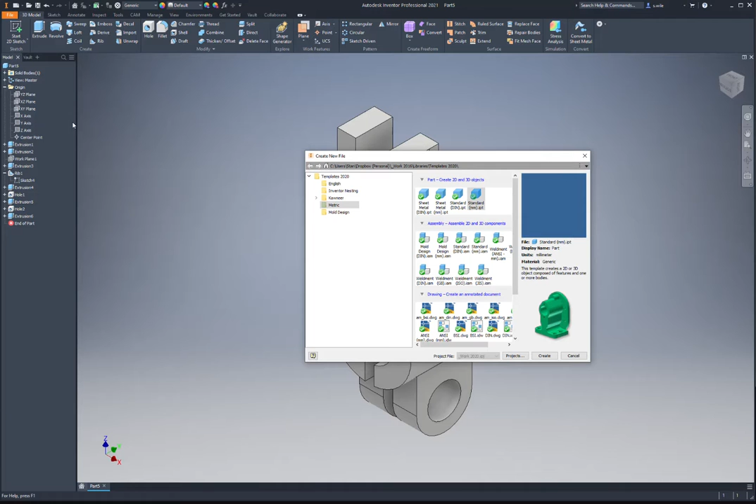So this is the next image in the exercise. Let's knock it out. It's metric part 2. I'm working off a printed copy and the text didn't print very well. But it's kind of fun to model these simple parts.

I'm going to start with the base. Your base feature, you want to always figure out what makes the most sense to build off of. I'm going to start with the bottom, and we'll do a center point rectangle, 120 by 42.

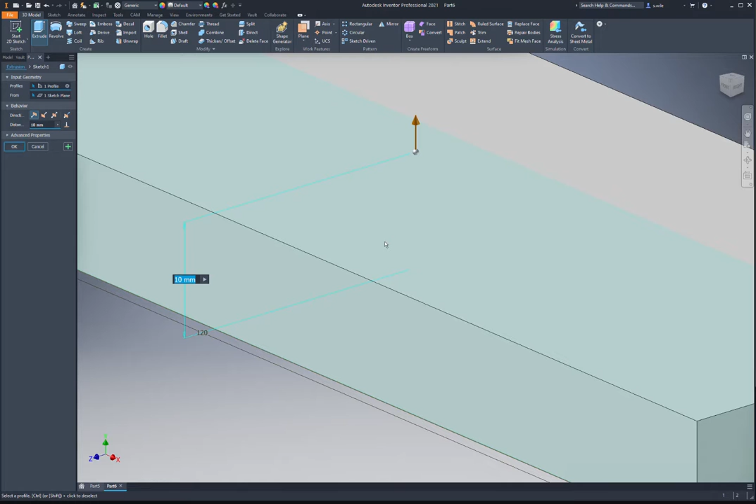And that goes up 10. So that's the base. Let's do this piece and the back piece next. It looks like there's a rib maybe in the back.

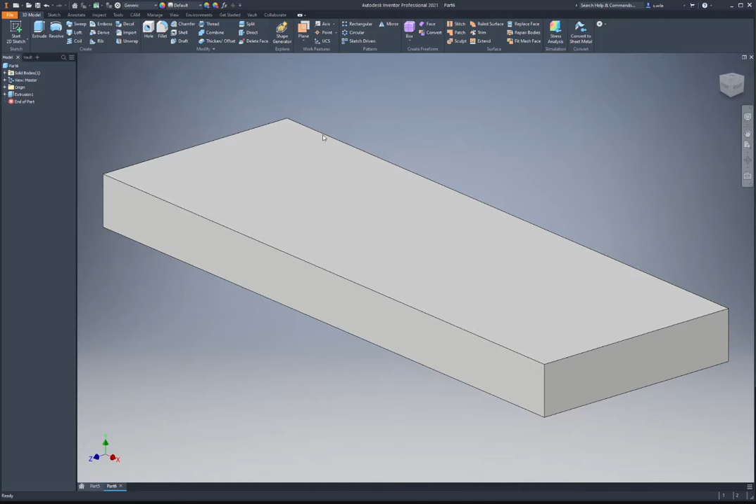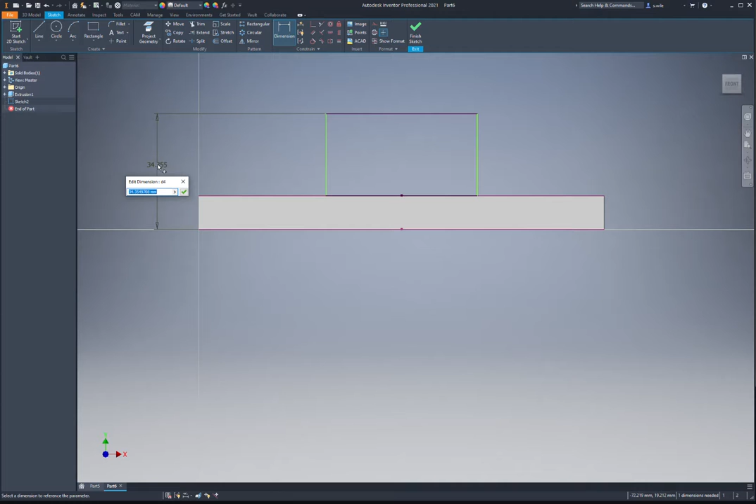So I'll do a midpoint to midpoint, get the little dots, and I'm going to take it all the way up to the center, I think. So we'll cut it away with the hole afterwards. That'll give us a center point for that hub. I think it says 105.

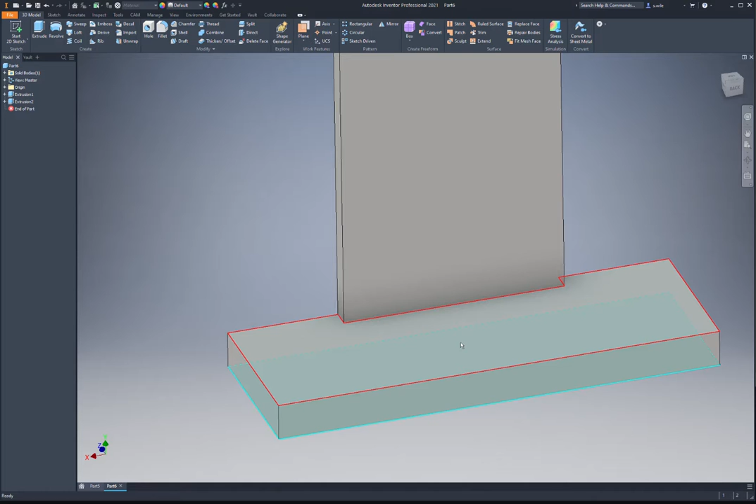And then we'll put that rib here. It's probably a 5 as well, just right down the middle. Let's project it... that's too much work. Let's just do a midpoint again.

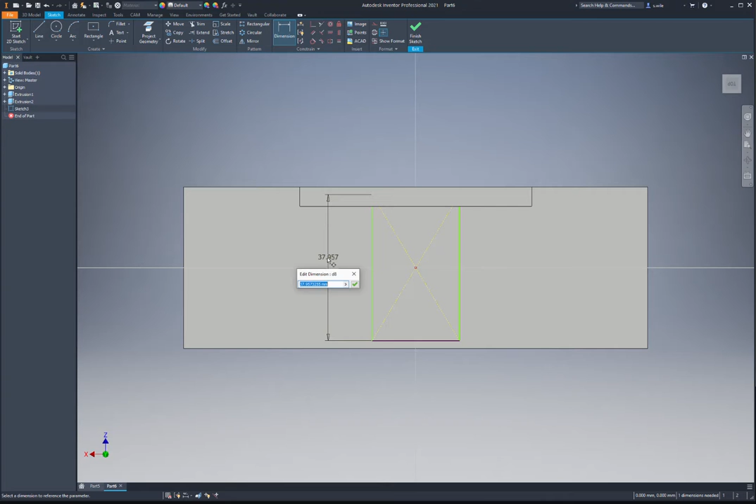And this is 42. I'm just going to tell it to go to here. And we'll put that circle on. We'll do the circle next, and then maybe that top.

I'll try to get all of the solid body done, and then we'll come back. So this looks like it's 45, and this is 42. So it's sticking out 3 past.

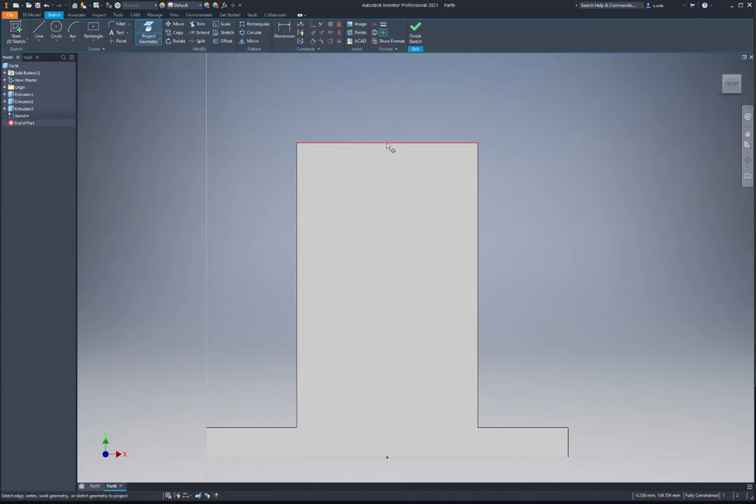And we can do that with one extrusion. Because I took this up to the top, that center point's my circle. When I extruded this up, I took it to the 105. So that's a fully constrained sketch. That's all we need.

And we're going to say both directions asymmetrical. We want to go 3 in that direction and 42 in that one.

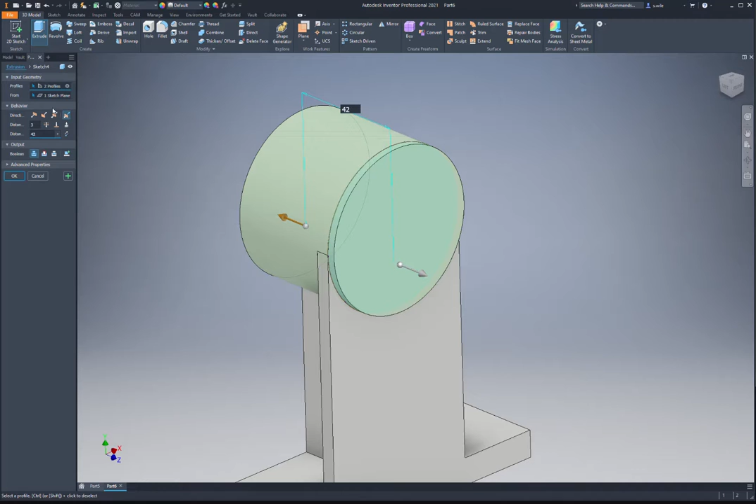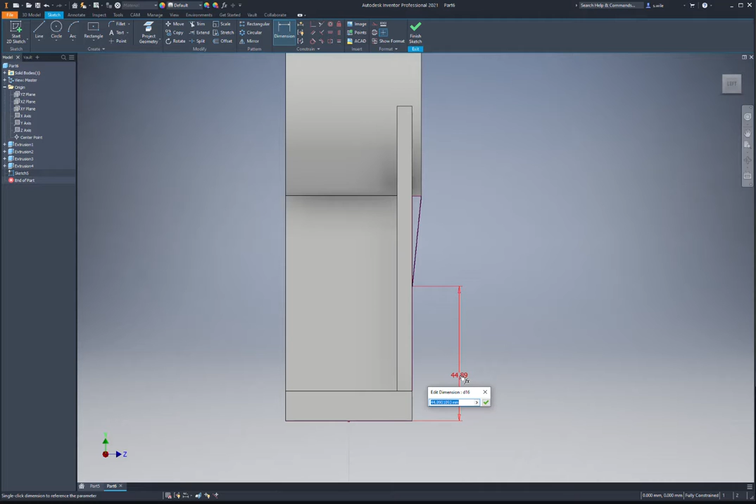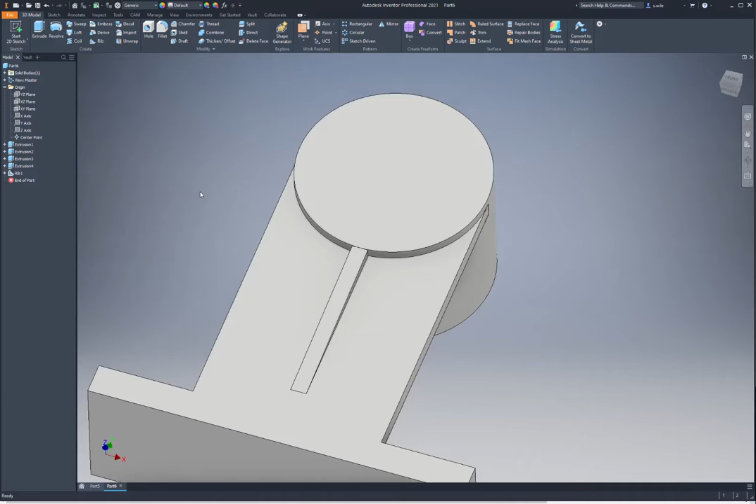And I'll do the piece sticking out here, so that's going to be another midplane. Project off the... ooh, I'm not going to be able to project off the top. So I'll go off of the center.

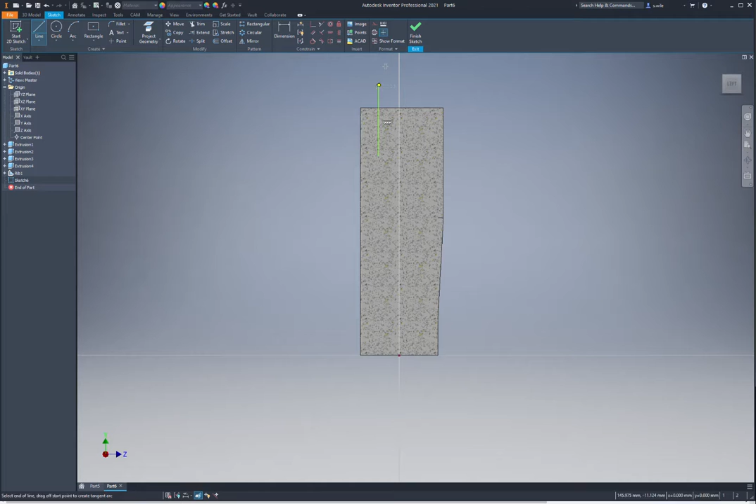I'm going to take that to the center, even though it doesn't have to be that high. And I'm not given a side-to-side dimension. Actually, I think I'm to assume it's 3, like the rest of it.

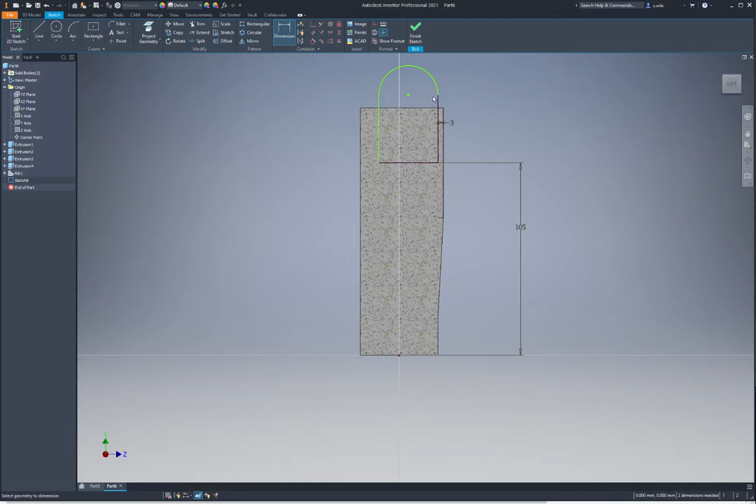And a radius of 14. And then off of center is 42. Should be it. And that's going to be symmetrical.

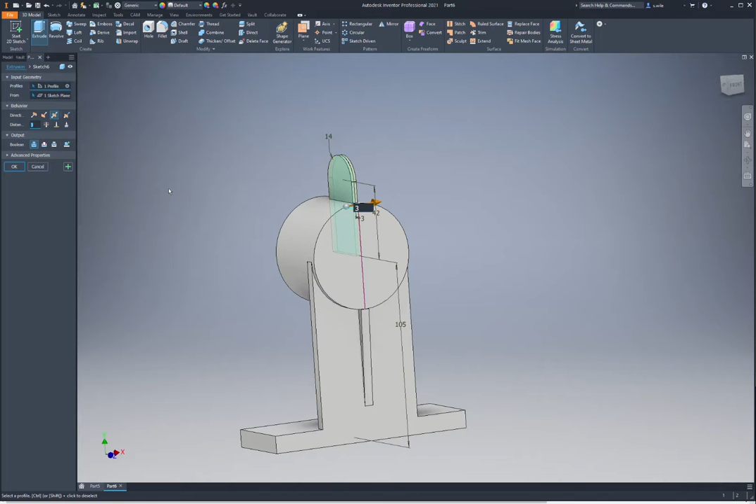32 and a 3 mm gap. So 32 times 2 plus a 3 mm gap. That doesn't work out. Oh, I know why.

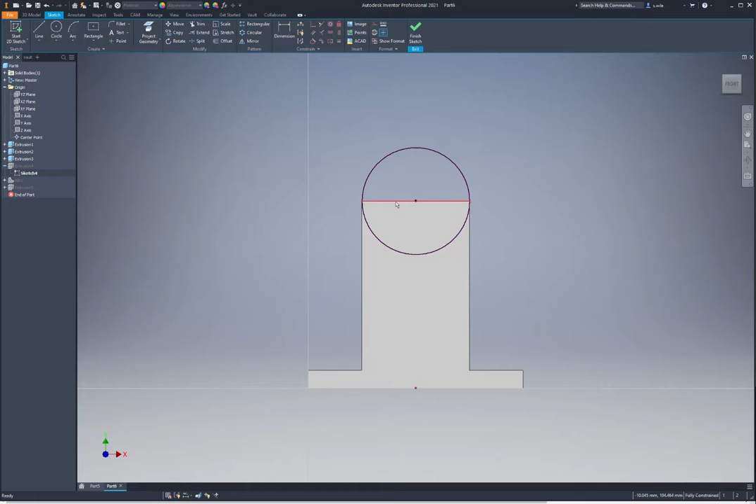Yeah, I know why. So this circle is not actually connected there. It's actually bigger. It is 70. There's our problem.

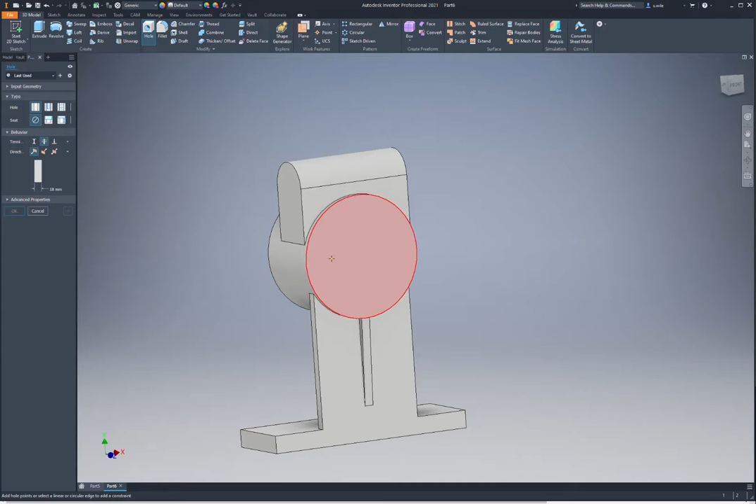And we'll just start adding some holes to this sucker. So we'll do a concentric hole on him. That is 60. And another concentric hole on him. That is 12.

And then when I got 2 holes like this, there's going to be 2 holes on this base. This is how I like to do that. Because they're centered, I usually draw a line.

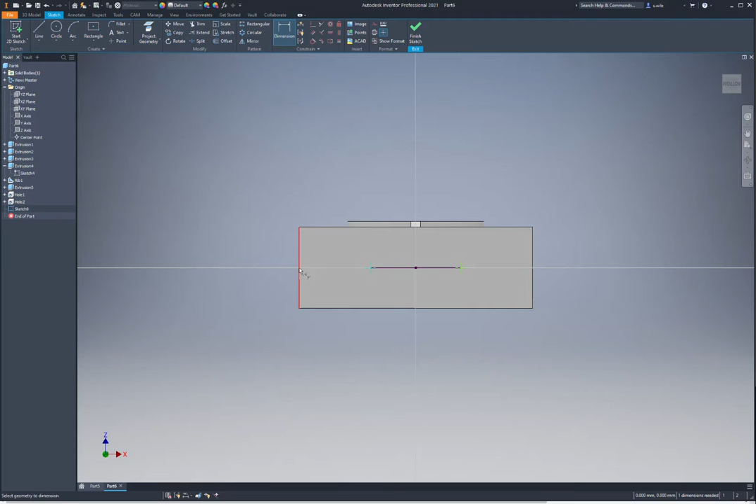And turn those to center points. And then I do a coincident from midpoint to origin. And then I only need 1 dimension. I'm fully constrained. And that is not actually the dimension they're giving me.

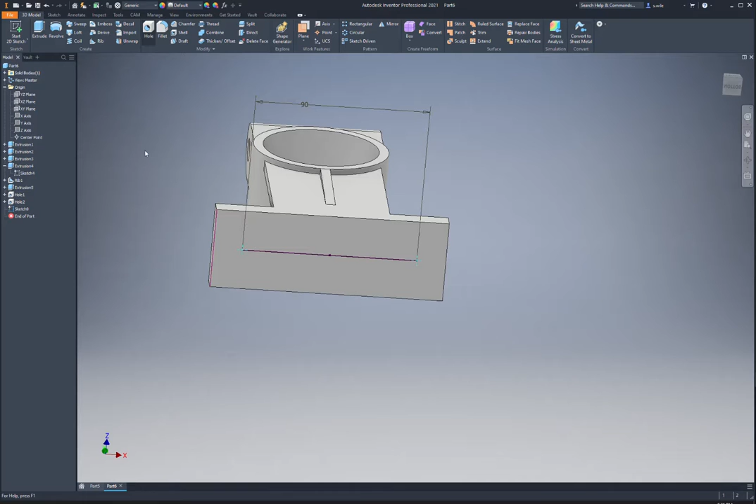That is 96. It is 90. That's usually how I do pairs of holes, or if it's 4 holes for a pattern, I'll do a square or rectangle.

Throw some fillets on here. So they're not giving us... oh, there it is, it's 16. And then we need the groove, and we got 1 more set of fillets. Let's do that while we're doing fillets.

We are not told what that is, so we're gonna say 3 will be my guess. Maybe a little more than that. Let's try 5. That looks pretty good.

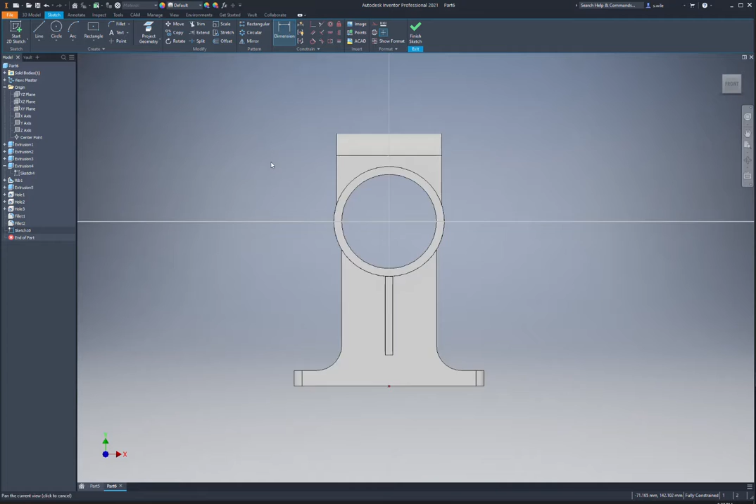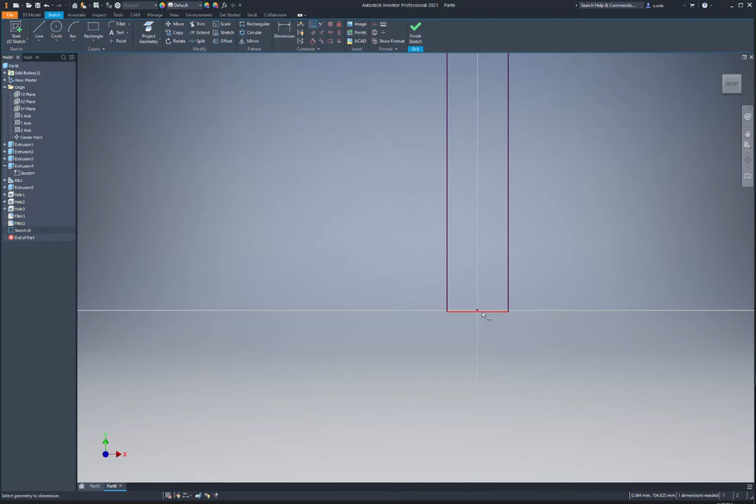And then the last one's that same cutout we did on the last part. Come on... fully constrained. Extrude him.

This time I'll hit E. I don't know what I pushed there. So, through all cut. Okay, I think that's the part. That is this guy. Let's go to number 3.

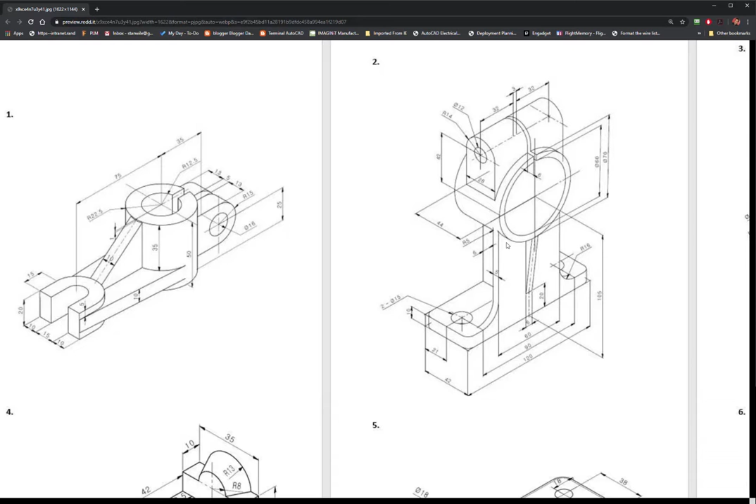Number 3 looks like this. We'll do him next. I don't know where I was saving this stuff. Doesn't matter. New metric part.

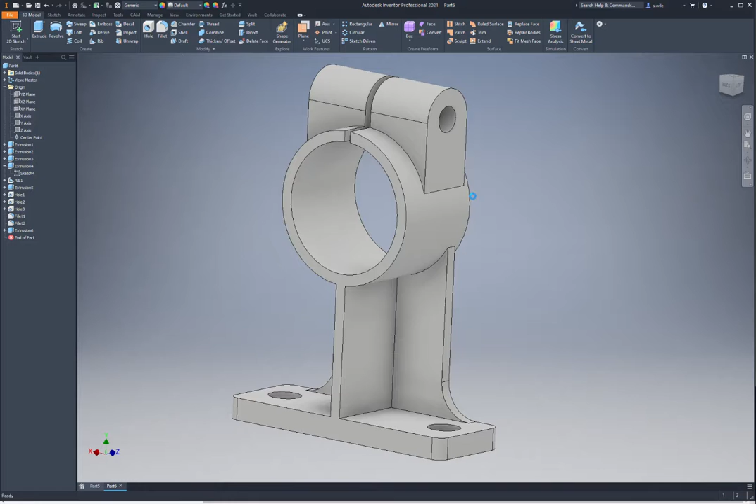So you want to look at what makes a good starting feature. For this one, everything's kind of offset or mirrored, I guess I should say. So having your origin right in here is good because then we can mirror across already established planes. We don't have to go make a bunch of planes.

So really a good base feature for this part is this square in the center. This 50 by 50 square that is 12 wide. That's what I'm going to start with.

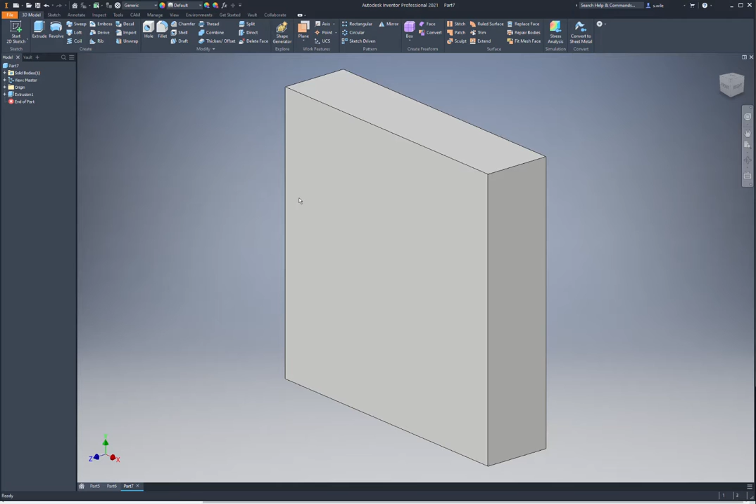Then I can do one of these ears, mirror it to the other side when I'm done. So let's do it: 50 by 50 by, I think I said 12. And then we'll do the first ear coming off the top. So that's just going to be a sketch off the top, and a circle that is 12.5 times 2.

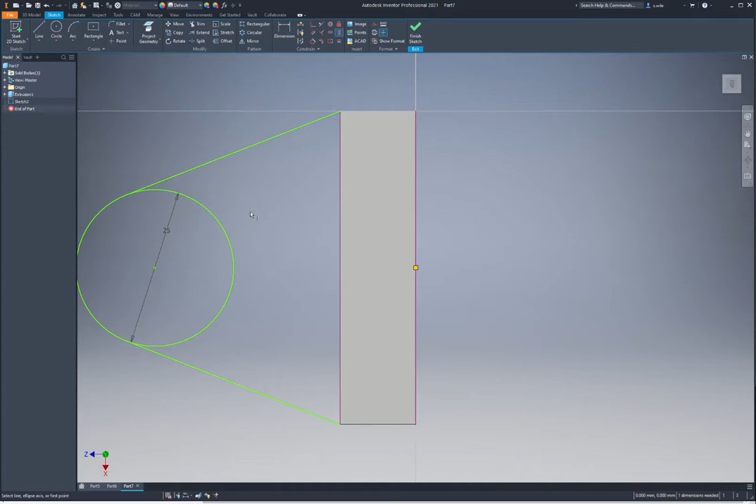And then line him up. It's 25 off the side. That's it, don't trim or anything. You just lose constraints when you trim. Leave it alone once you're fully constrained.

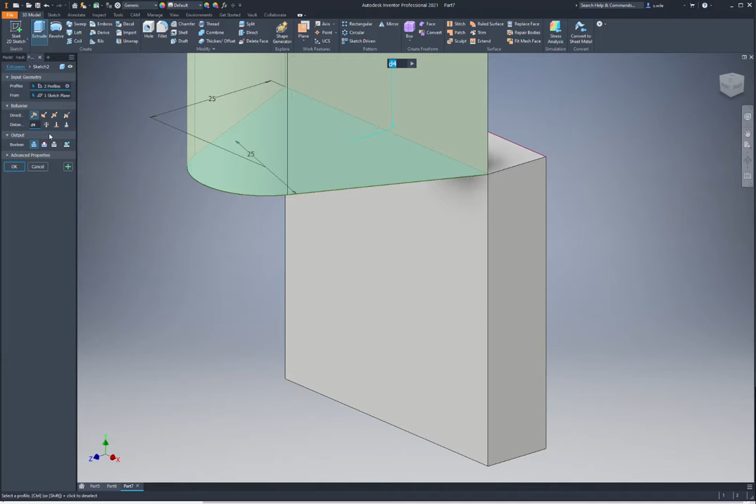It doesn't tell me a thickness, but I'm going to assume 12 because everything else looks like it's 12. And then this hub actually kind of comes on past here. So we'll get our center point, draw a circle, and extrude that up.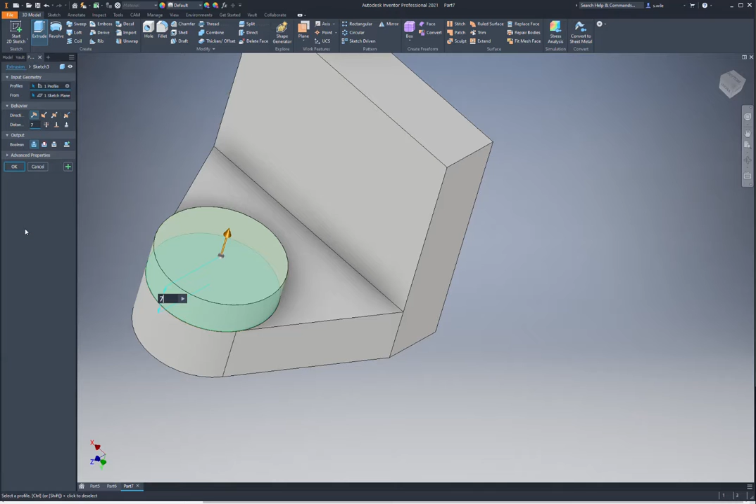Seven, if my math is right. We'll measure this after the fact and see if I did my math right. Concentric hole, that is 18, and that's good.

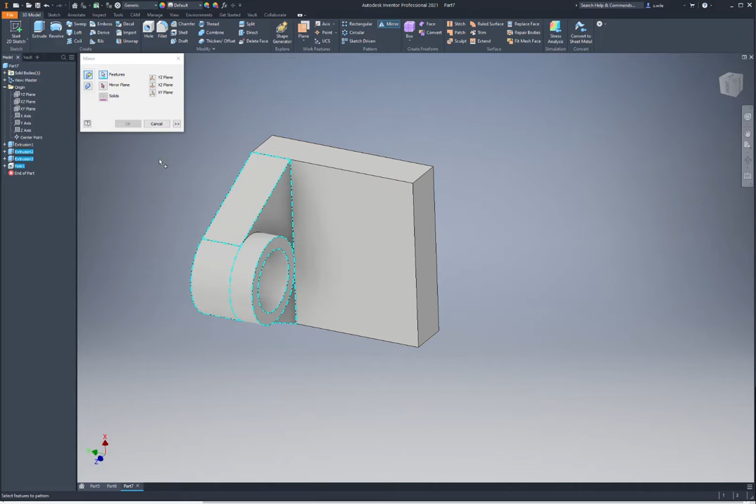We're ready to mirror that to the other side, and because of how we started, we've got planes running right down the center. It's perfect. So mirror, pick all of our features, and mirror it about that plane.

All right, so that's the start. Let's see what we have left to do. That's that part. Now we're going to just do the same little ear over here. Looks like it has a little round piece sticking out.

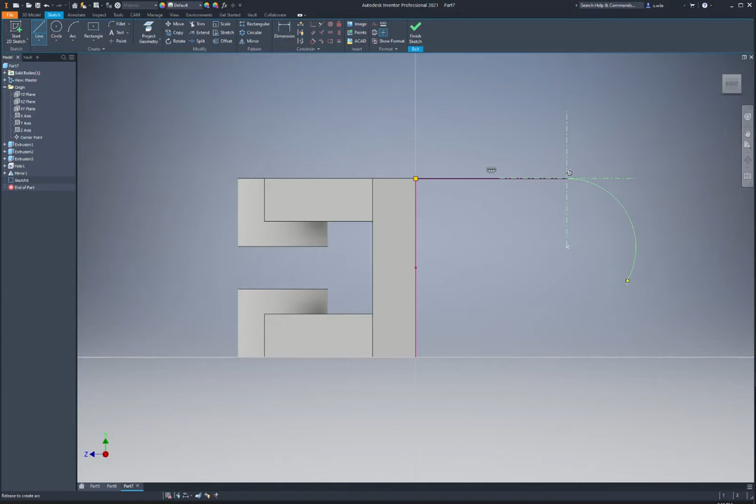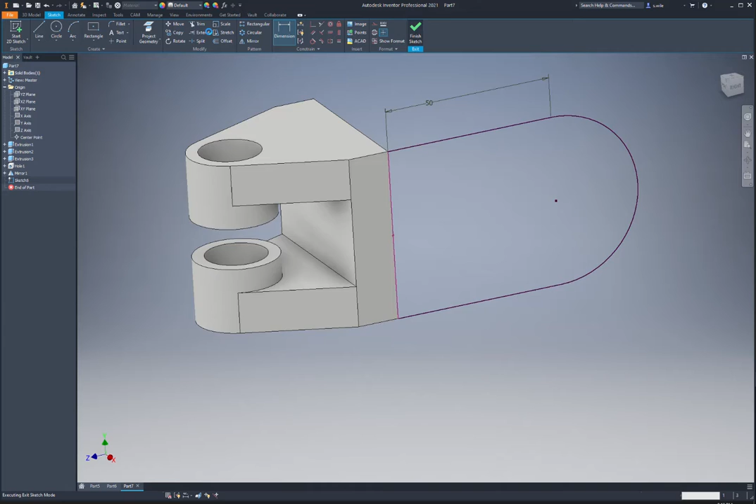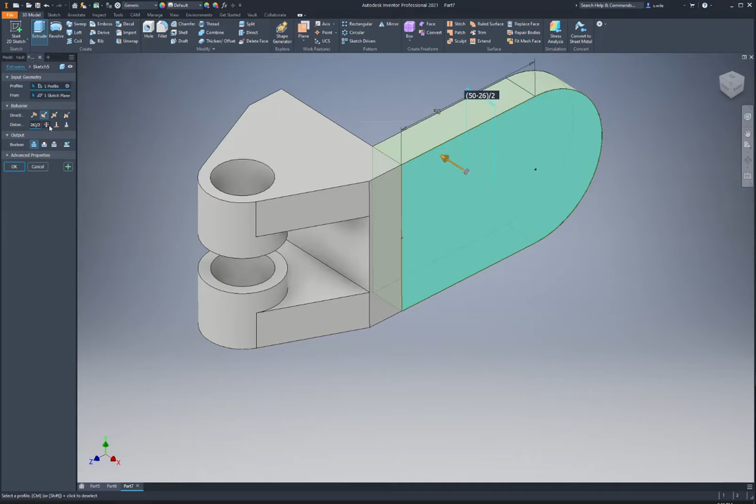And this is 12 plus 25 plus 13. Extrude. All right, so this looks like it's 50. Minus 26 divided by 2. And then there is a round piece sticking out here. That is 62 minus 50, so that's coming out 6. Hey, I typed 6. Take it.

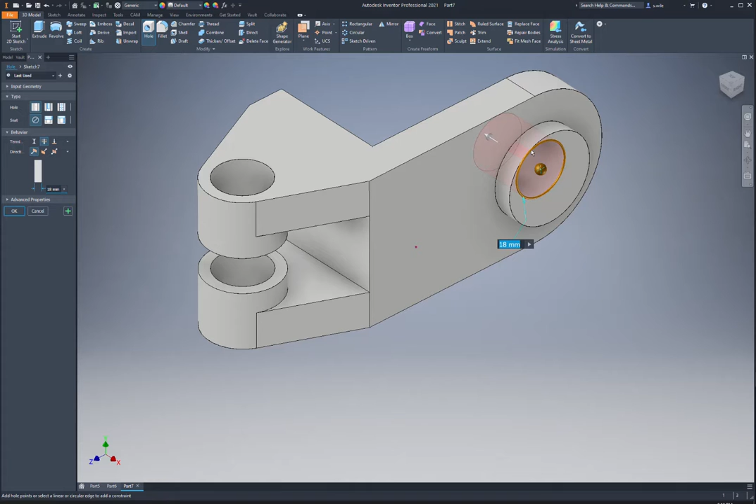And then we got some little notches going on here. So the simpler you keep your sketches, the faster you're going to be. You start getting crazy with putting all of these little notches in your profile, the slower you're going to be. So just try to do something simple and get out 25 and 6.

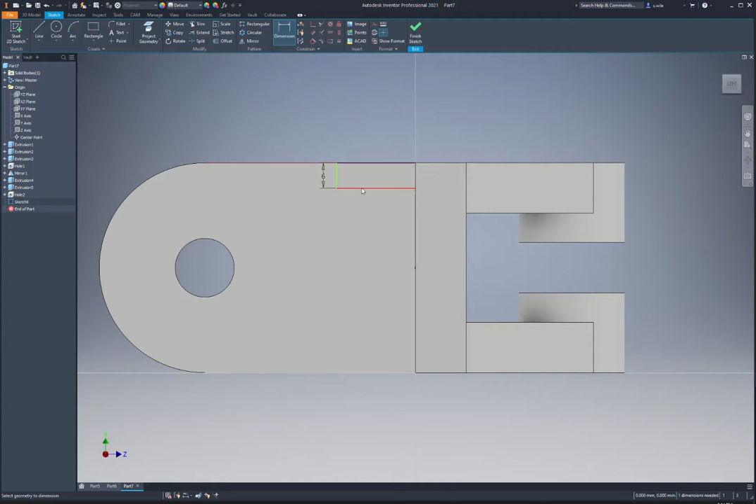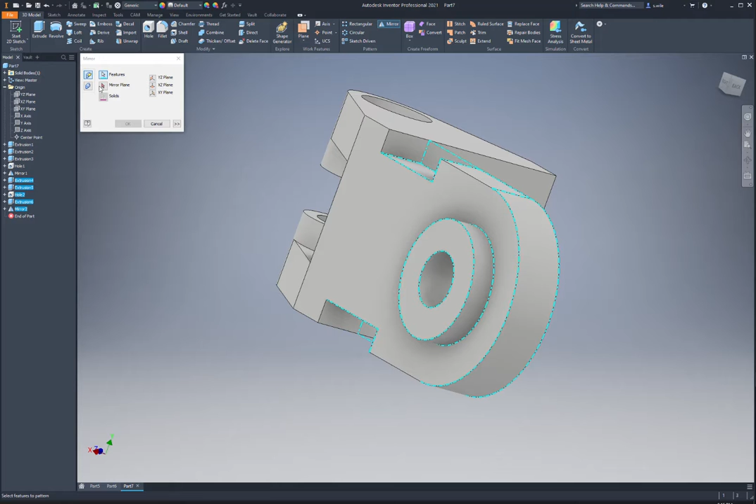So this is 6 by 20. And that is through all cut. Okay, I'm going to mirror that down. And then I'm going to mirror that and that. All right, I think that is that part.

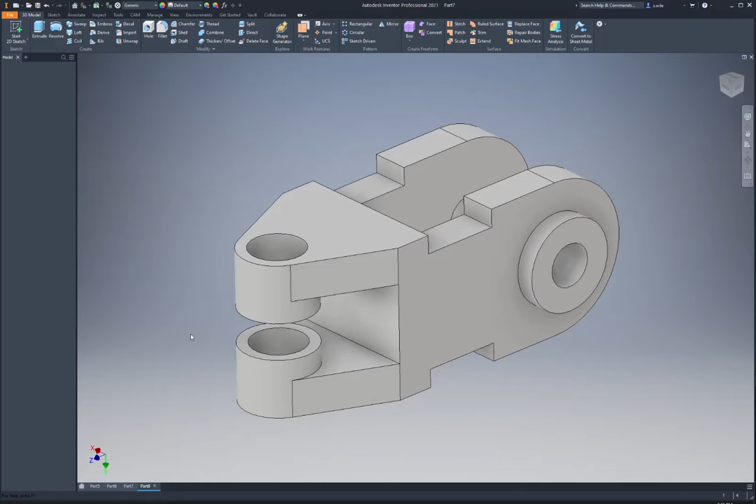Let's go to number 4. New. I gotta fix my standards. I just put 21 on this machine and I haven't got my design data quite right yet. So number 4 is this one. I think this is the last one I'll do and I'll post this video.

So, base feature. I think I'll just start on this end and work my way across. Yeah, I don't see a side-to-side plane, that being that necessary. So I'm going to start here, work my way across. That is 44 by 26 and 16 high.

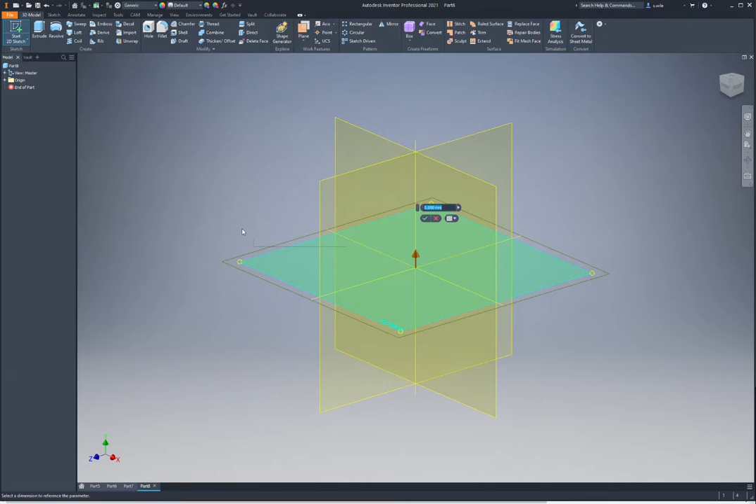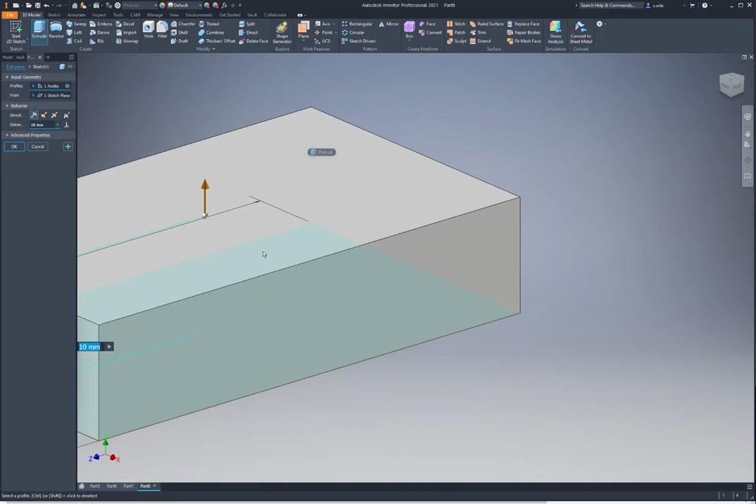Hey, get in there. So, 44, 26 by 16. And might as well just put that slot in here while we're here.

Yeah, did you see that? I didn't go horizontal. So now I got to clean it up. I'm going to say that midpoint's on that, the center point is on the midpoint horizontally aligned. So that means I only have 2 dimensions that I need.

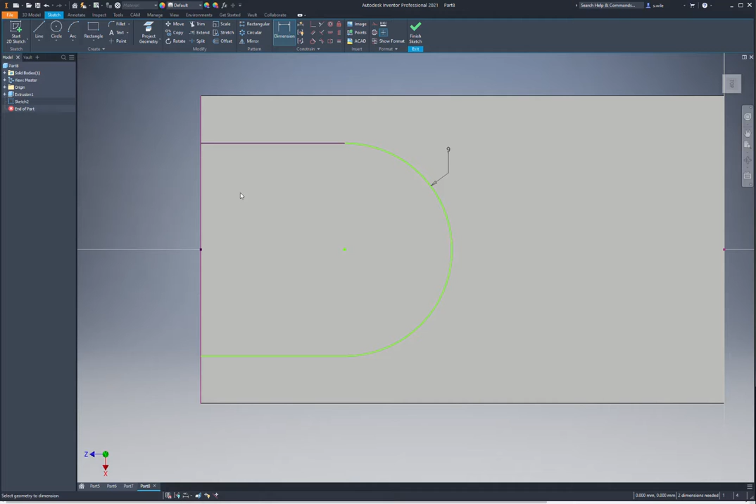So this is a radius of 9 and 25. And if you got something green, you still have 1 dimension that needs to be constrained. So grab a point and drag it around and see what the problem is.

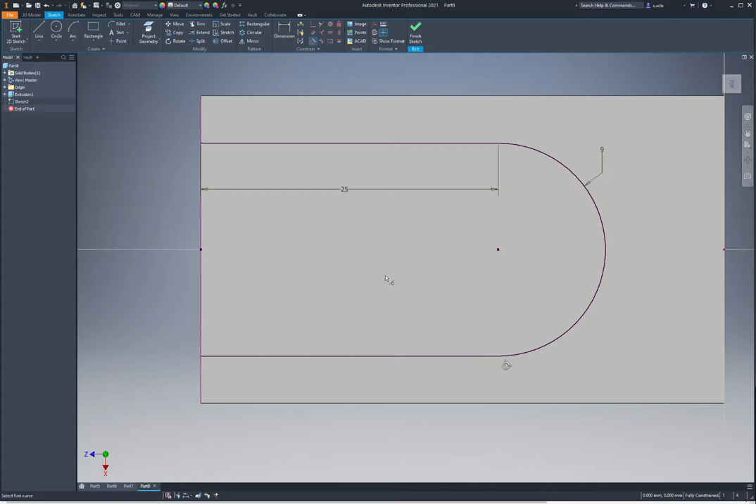It's not fully constrained. Don't fix it. Don't put it back there and try to fix it. Leave it off so that when you do fix it, in this case I'll add a tangent constraint, you actually see it snap into place and then you know that you fixed it.

So this is going to be a cut of 12. All right, then on the back side there is another rectangle. And I'm not going to draw in the chamfers.

Hey, I switched back to my web page and it didn't switch. Don't draw in these chamfers, that's just a bunch of extra work. That's actually a 3D feature. Leave the 3D feature stuff for the 3D environment. So I'm just going to draw another rectangle.

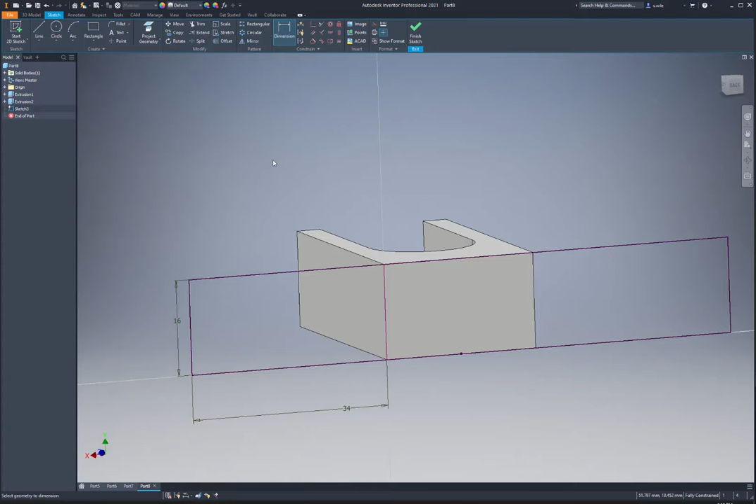Lock the midpoint onto my origin point and dimension them up. So this is 34 by, I think you're to assume it's the same as the other one, so 16. It's 17 deep.

And then if you want those chamfers, then you put those chamfers on here. And it's an uneven angle, so that's going to actually pick a face. Then you can pick your two angles. Actually, I don't know the angle, do I?

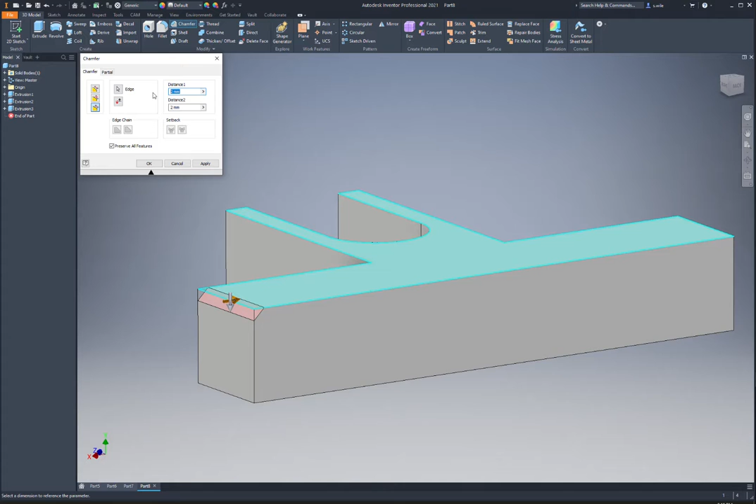It's an unequal distance, so this is going to come back 15 and go down. See, 16 minus 9. 16 minus 9, I think that's what I'm doing. Just switch its direction, and there's your two chamfers.

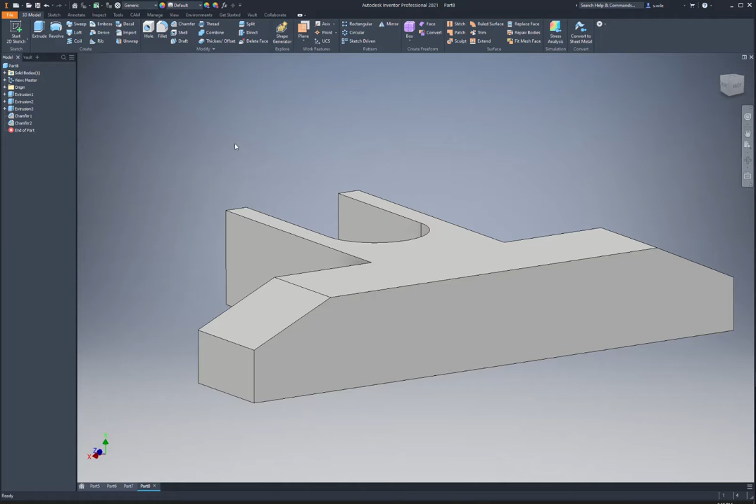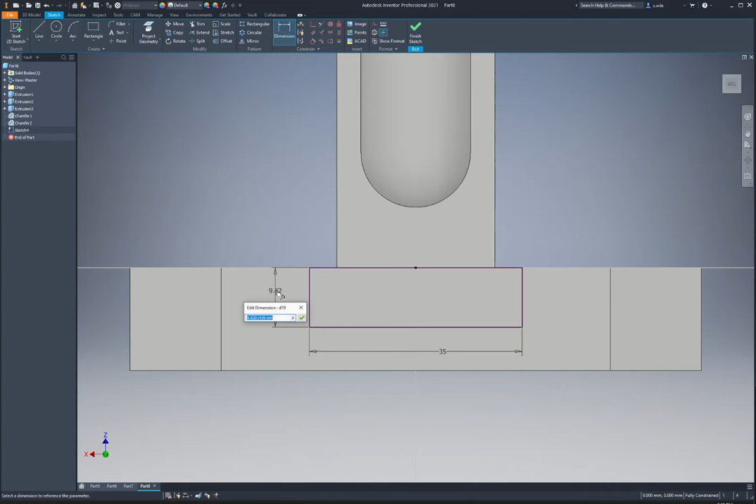Probably could have built this into the last step, but I didn't. So this is probably 35 and 17. That's going to go up 16. And then I'm going to put a sketch on it.

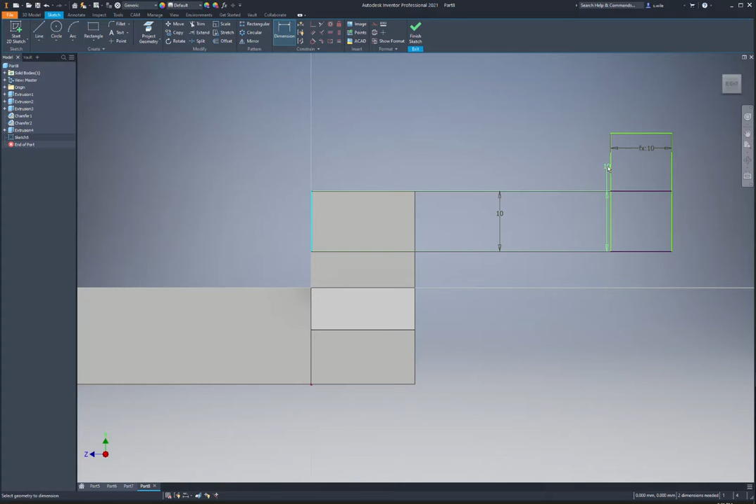Draw two rectangles. I think two rectangles is the most amount of geometry you should have in one sketch, if at all possible, because the rectangles are somewhat already constrained. I think 8 pieces of geometry is okay, but once you get into more than that, you're spending too much time in the sketch, not enough time actually modeling.

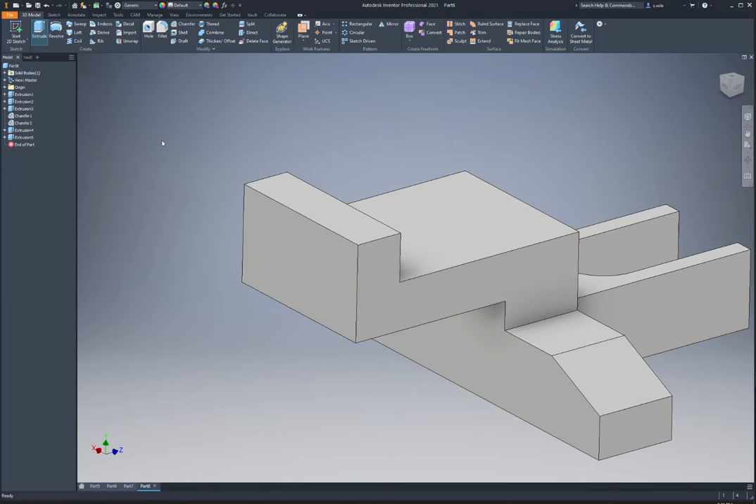All right, that's going to go to here and not cut. We'll throw our fillet on here since we're here. It's a radius of 8. And then we've got a loft happening down here with this 8mm radius.

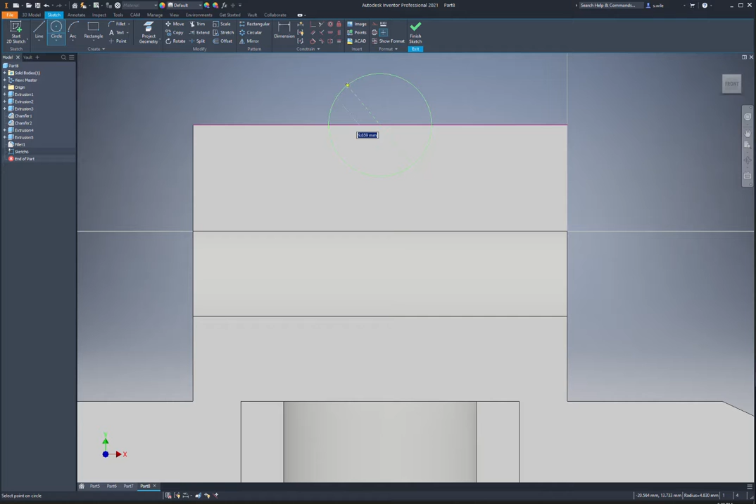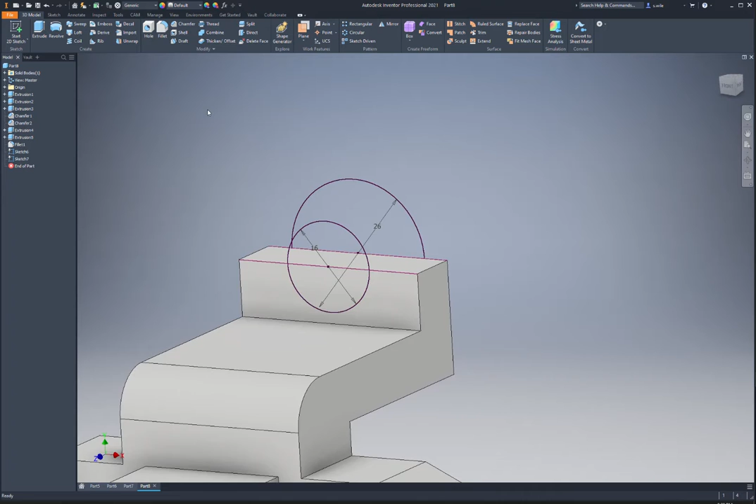And then it's going out to a 26, diameter of 26 on the back side. Rather than trim it all up, circles are fine because it's just going to go into the solid. I don't trim stuff up. Pick my one profile, pick my other profile. That's what you're after.

Looks like there's a hole through here. 12.5 from there, and 35 divided by 2.

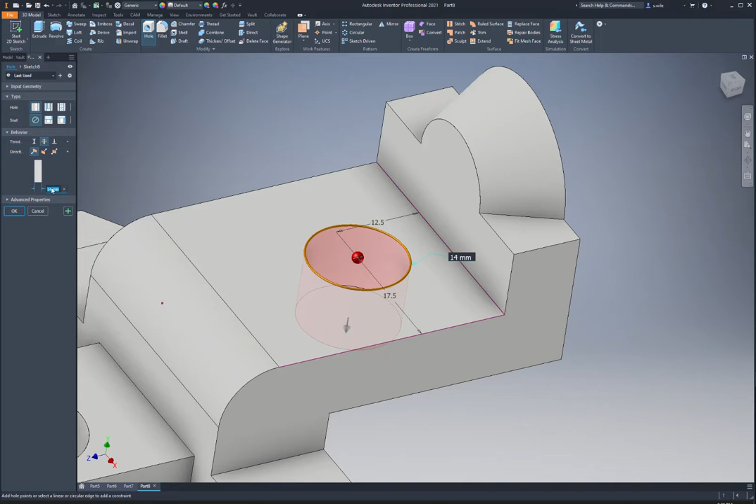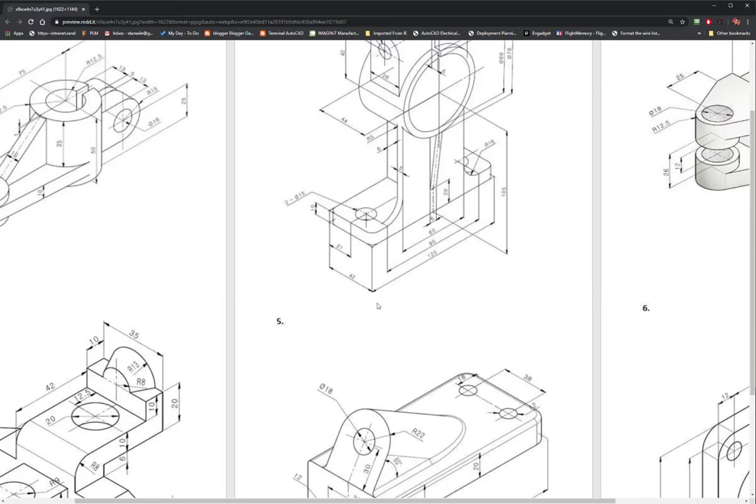And I think that is part 4. What the heck? Let's do part 5 yet. Let's see what part 6 looks like. I'm not going to do part 6. That's pretty close to, I think. We'll do part 6, part 5 yet.

This is a pretty quick one. I'm just going to draw an L, 2 rectangles, dimension them up, extrude it across. Then you put your holes in. There's some fillets. Then I'll pivot a work plane, rotate it around that edge by 60 degrees or 30, depending on how it gives us the dimension. And draw this shape and extrude it down in. This is actually a pretty quick part.

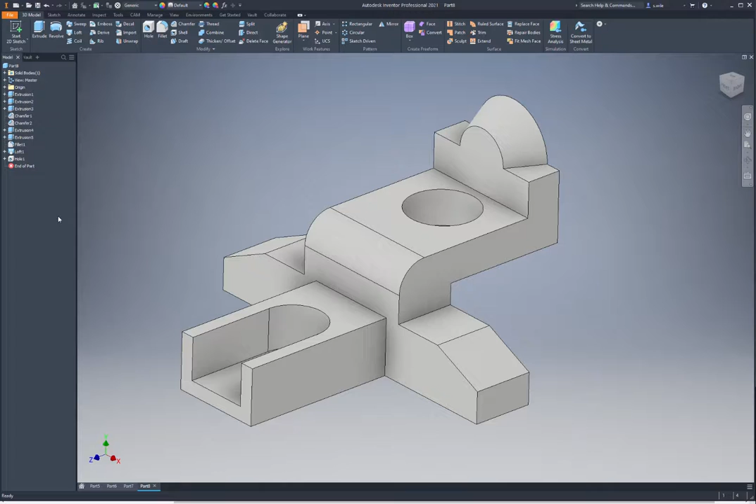So let's do number 5. New metric part. So we're going to do our L shape for starters. Actually, I think I'm going to make that my origin. So there's my L shape. And this is 50, that is 150. Looks like it's 20.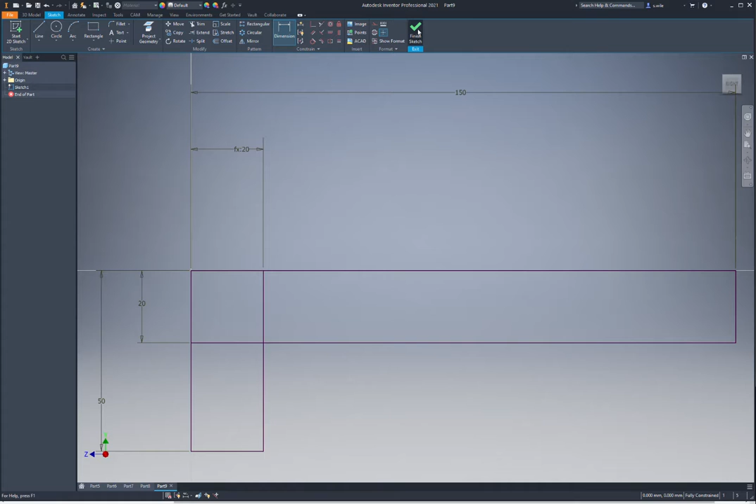And you can just click another dimension, it types it in there for you, so you don't have to type it over and over. Say symmetrical, so we keep our origin in the center. And that's 76 millimeters.

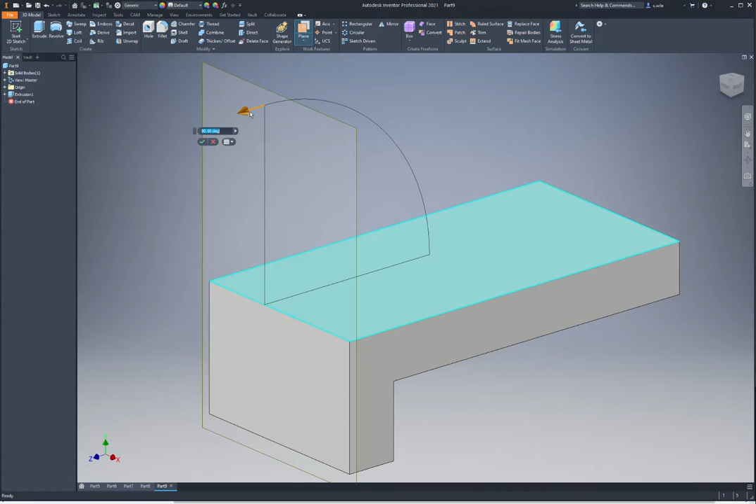And let's just finish off this piece, right? Because this is the trick for someone who doesn't know how to do it. You start work plane, pick your axis, and then you pick the plane you want to reference. That's what you're trying to get to, 60 degrees. Put a sketch on that and project that edge, and then draw your half of a slot.

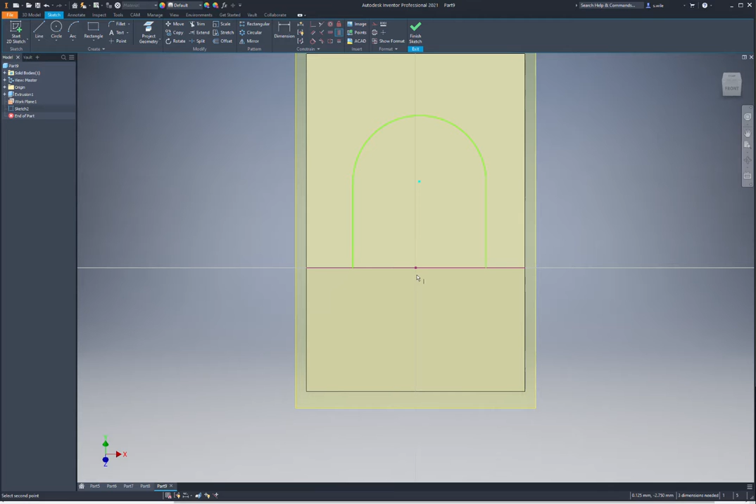And I might have to switch machines because the last video didn't seem to show it, but my mouse is really lagging and jumping, and I think it's because I'm trying to record and this machine's not the best.

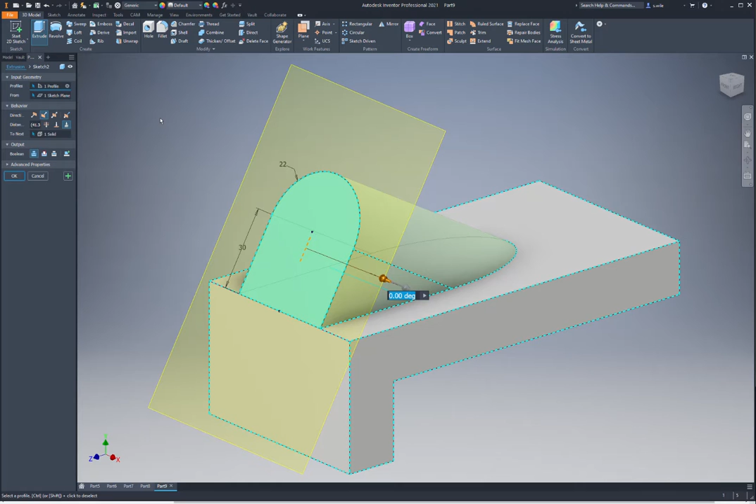All right, fully constrained 30. All right, finish sketch. And then when I say extrude, I'm just going to say to next. It finds material and it ends. I could have also said to, and picked that face. And then turn our work plane's visibility off and run some holes through there.

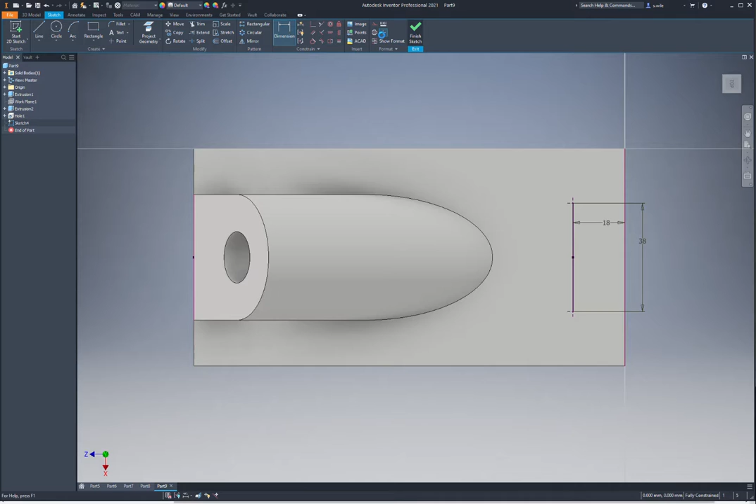36 apart on these, 38, and it is 18 off the front edge. Those are 12. Put another sketch on this guy and then pretty much just do the same thing.

I mean, this is how I do sets of holes. Usually I'm a little quicker, but I got this lag that's making my mouse not quite where I think it is. 38 and 34 from the top.

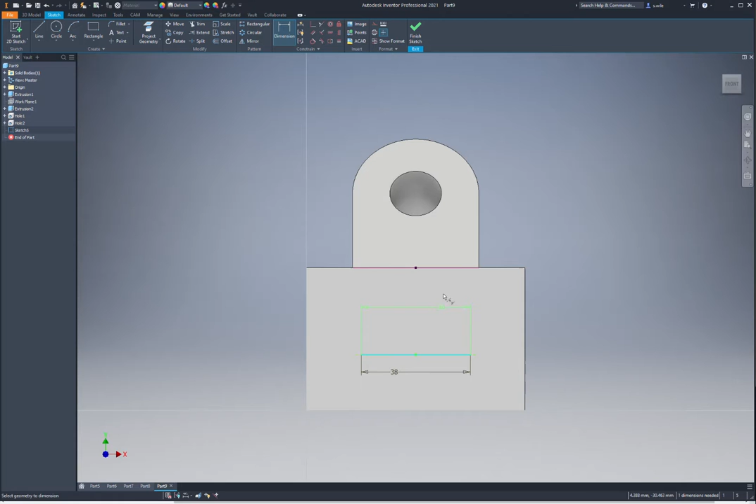All right, then after that is a bunch of fillets. We are not told what any of the fillets are. Oh, we can see what this one is. So this edge and this edge, we are told what that is, which I'm going to assume is also this one and this one. That's 10.

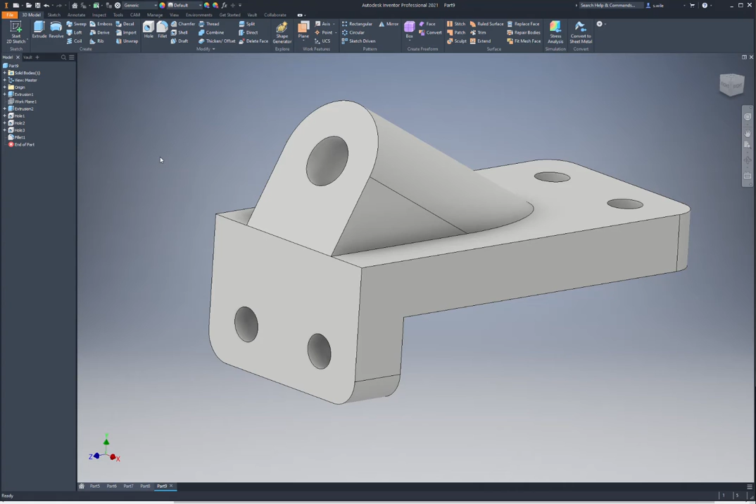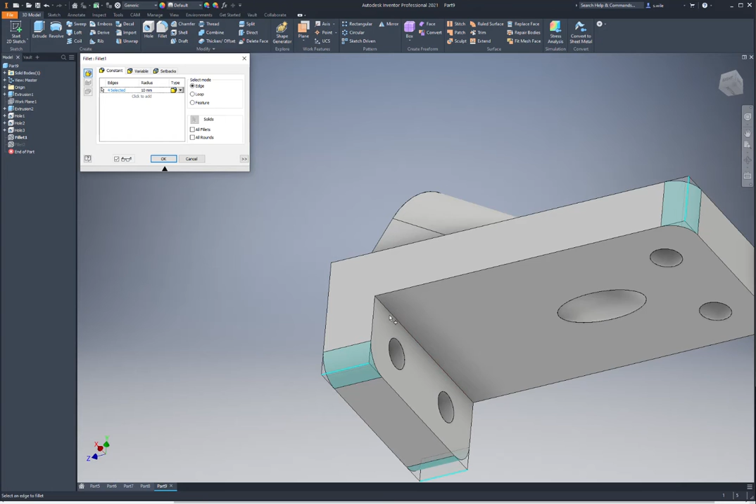But there's probably a 5 running around these two. Nope, less than that. I'll go with 3. So I think this first fillet, I think I should have also picked that edge. No, I don't believe that's correct. I think that's the 3 like the top. I think that is that part.

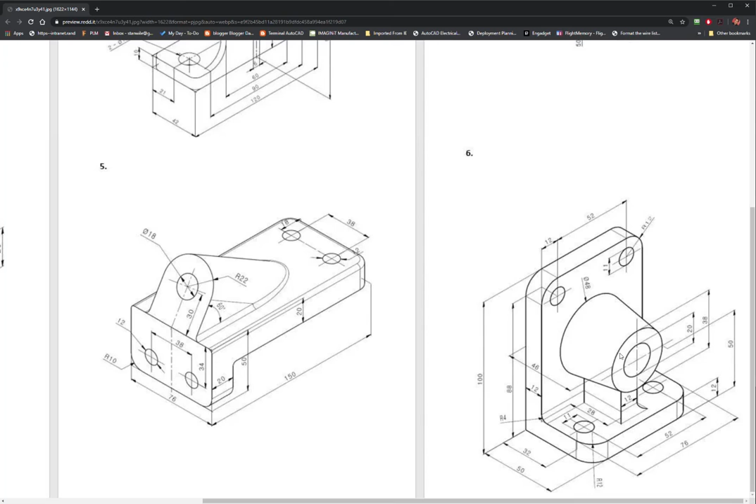So what the heck? Let's do number 6. It's kind of fun. L shape. You're going to do a circle of 48, offset a work plane 28 millimeters, draw your smaller circle, loft between the two circles, then you run your hole through it. I don't think I'm going to do it.

This is a lot of fun. I'll look for some other sample parts, maybe something a little bit more complicated. Just drawing off of a print like this was fun for a change. So hope you enjoyed it.